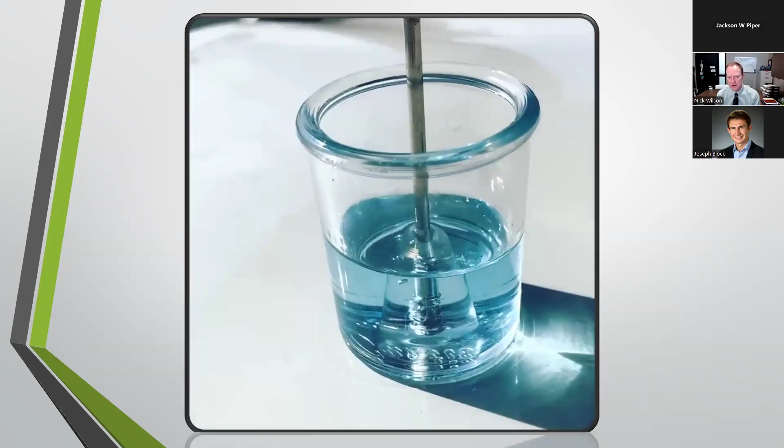This might look like Gatorade, but this is our well-known friend in the GA community, and I say friend in quotes, 100 low lead. 100 low lead has been powering aircraft for quite some time, and I'm a part owner in a small aircraft, and we need 100 low lead currently to fly it.

So it's facilitating our training needs and performing a needed role in general aviation currently. The downside, as is growing in awareness, is that the leaded part of 100 low lead is a neurotoxin. Because of the tetraethyl lead composition, even though it's small volumetrically, it's not good for the environment or the people in it. This isn't the driver of change, but it's one motivator for these discussions, because no one should want lead in their environment. It just isn't good for any of us.

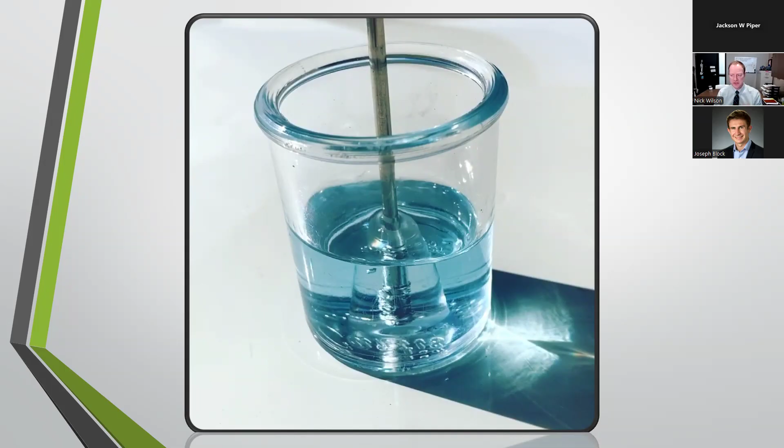So I bring this up as sort of an imagery to think about as we're talking about some potentially better options for aviation going forward.

We can move through here, well introduced by Jackson Piper. Yes, I've been at University of North Dakota now approaching 11 years and regularly speak on this topic and others related to aviation.

So there it is, UND. If we have webinar members not from the Minnesota, North Dakota, or Midwest area, you may not know University of North Dakota is about a 1 hour flight northwest of Minneapolis, or about a 4.5 to 5 hour drive depending on how quickly you drive. We're about 70 to 90 miles south of the Canadian border. So we're up there, with cold winters and warm summers. That's where we're at.

We're a good training location, providing our graduates a variety of training experiences from wind to cold to warmth, all the in between.

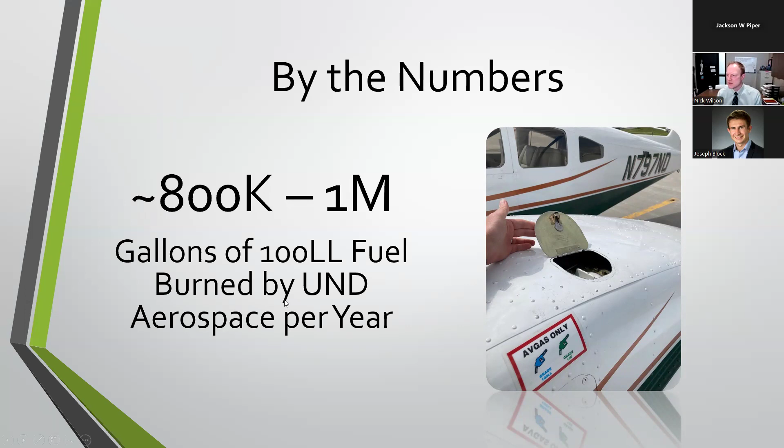The other number to think about is 32,000. We did an approximate estimation of the pounds of 100 low lead required for one of our collegiate aviation students to reach the industry minimum flight hours of 1,000. That assumes they're flying certain aircraft at certain times, giving benefit of dual received or dual given, that sort of thing. So about 32,000 pounds of fuel is needed for our graduates to reach those required numbers.

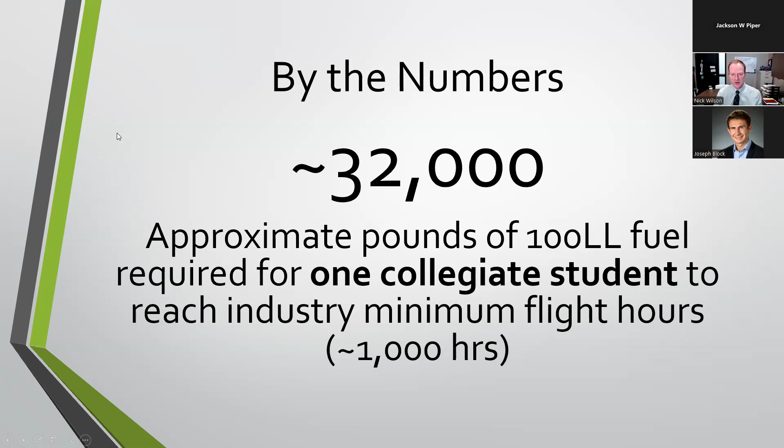So can we do better? That's sort of the question. Let me go back a bit - went too far, there we go. All right, so one of the questions is, can we do better?

This idea of alternate powering of aircraft is not necessarily a new idea, but it's been gaining a lot of momentum. One example is the Pipistrel Velis Electro, a two-seat light sport aircraft with EASA certification, and it has some recent changes to its certification in the US, or its ability to be used for training under an exemption. There are still some limitations there we're going to talk about.

There's also been some attempts to convert existing airframes. CAE and Piper were going to work on converting an electric aircraft. Bye Aerospace is working on their electric E-Flyer 2 aircraft, and they're still working on that. So there's industry motion there.

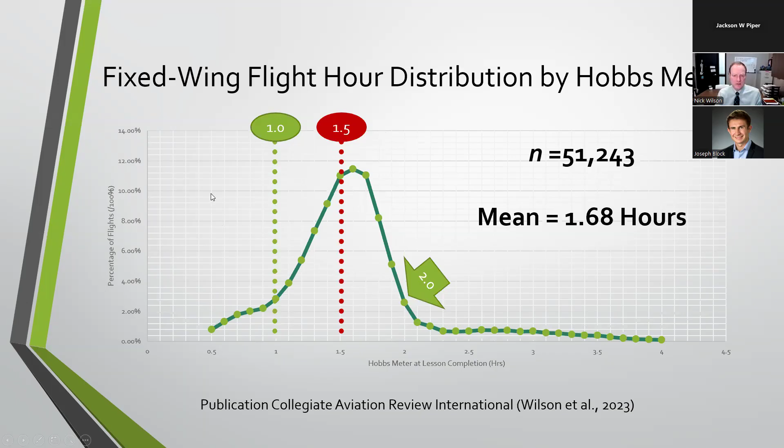So what we really need in our flight training environment is an aircraft of duration of at least 2 hours plus FAA reserve. If we look at our mean of 1.68 hours for flight hour duration, an aircraft that has an hour of duration or an hour and a half really wouldn't meet our current needs today without changes.

Here's the same graph, but a little bit of a different view of the same information.

So from 0 to 1 hour of Hobbs meter length, about 12% of our training flights go from 0 to 1 hour. So if an aircraft can fly for an hour duration plus FAA reserve, it would only cover about 12% of the total flight lessons given our current flight operations.

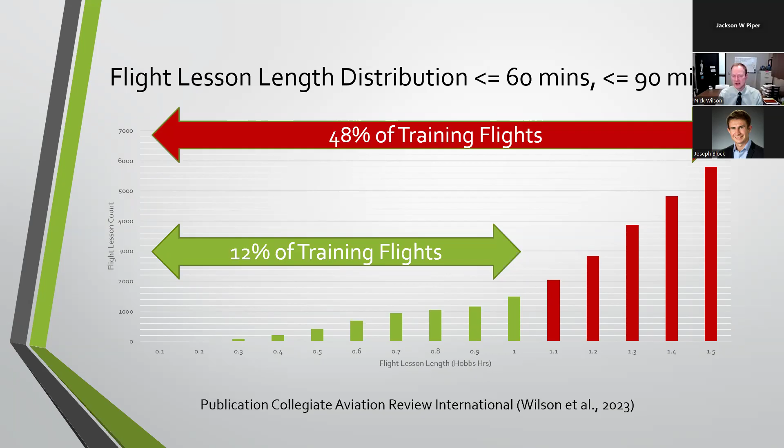Now, if an aircraft can fly 1.5 hours of duration plus FAA reserve, that's approaching half of the total flights. So then if anyone's into curriculum design, you would say, well, that's not really the full story, is it? No, it is not. So let's take another level of analysis on this question.

So then we started looking at it on a course by course basis, and we evaluated how an electric aircraft at the 60 minute or 90 minute, also known as 1.0 or 1.5 Hobbs meter, how many of those flights would be covered. If we look at the worst case scenario, we have over 10,000 flights in this subsample. If we looked at an aircraft that had less than 60 minutes of flight time, only about 8.5% of those flight lessons would be able to be covered.

Then we have private. Let's take a look at that. If we had private pilot curriculum, and we had an aircraft that had an hour and a half of duration plus minimums, about half of those flights could be used in the private pilot curriculum. So that's getting better.

And then if we go to the instrument CFI, also known as the CFII course for those in the field, there's about 3,000 flights in that particular curriculum during that time frame. Almost 80% of those flights could be done using an electric aircraft that had a duration of 90 minutes plus FAA reserve. So that's starting to look a little bit more promising.

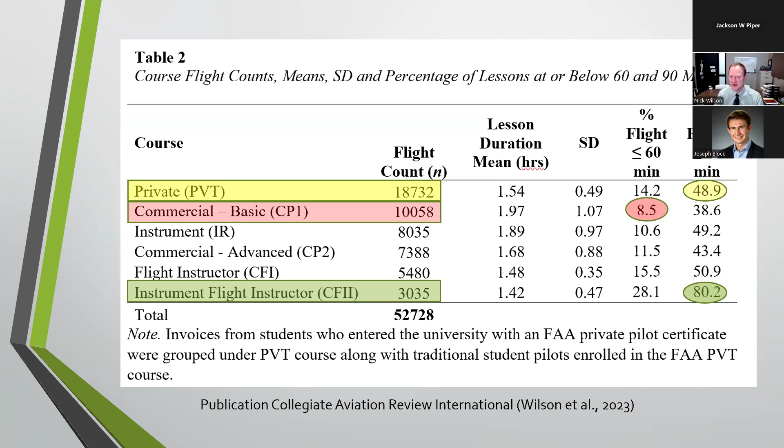And that's kind of one of the outcomes we had was, well, maybe we wouldn't do it in early training curriculum, but maybe you do it in the double-I course because of a better fit. A better idea we're going to get to is battery capacity. Let's get into that here.

Okay, so you can get the sense that you might be switching back and forth between a traditional piston-driven engine and an electric aircraft. That's not necessarily good at primary aviation training levels unless the flight configuration and equipment is set up so similarly that there will be potentially a reduction in the chance of negative transfer. But there's other questions there, that's not the complete topic. There's also risk with that as well, in my opinion.

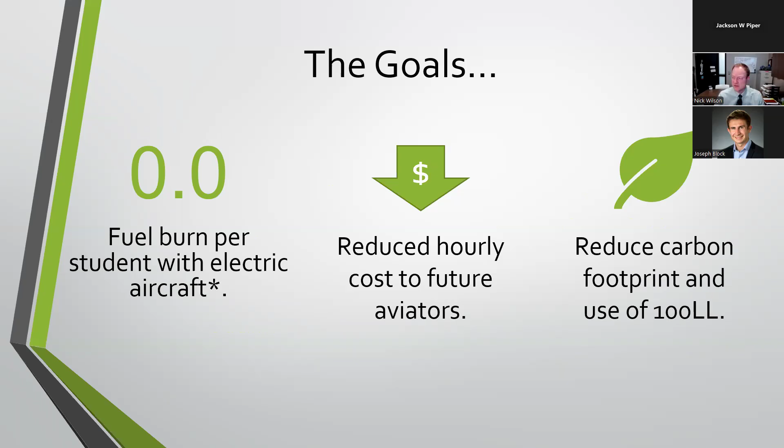But on a case-by-case basis, if we're not adding more fuel burn, generally that is a good thing. Reduced hourly cost to future aviators is good for everybody, helping not carry as high a debt burden entering the industry. And reducing our carbon footprint and use of leaded fuel, reducing leaded emissions into the environment, is usually a good thing. So we went relatively quickly through part one.

This publication, Technical and Regulatory Factors of Adopting Electric Training Aircraft in a Collegiate Aviation Setting, is available if you search scholar.google.com for this title of the article. You will find it, and it is free to download. There's quite a bit of background information in there to consider if this is the first time you're engaging in this topic.

With that, I'll pause and open it up to questions. Jackson, do you have any individuals who have offered questions? I'll get a drink of coffee while you do that.

I see a question here from Nathan Williams asking, are you tracking your ground time? What is the average time an aircraft spends on the ground between flights? Yes, this is a great question. As part of this data set, we did not look at ground time. We have this data, so the short answer is, do we have ground time? Yes, we can get ground time. At one point I knew what the average ground time was at KGFK, but I don't want to misquote that or give you a wrong impression.

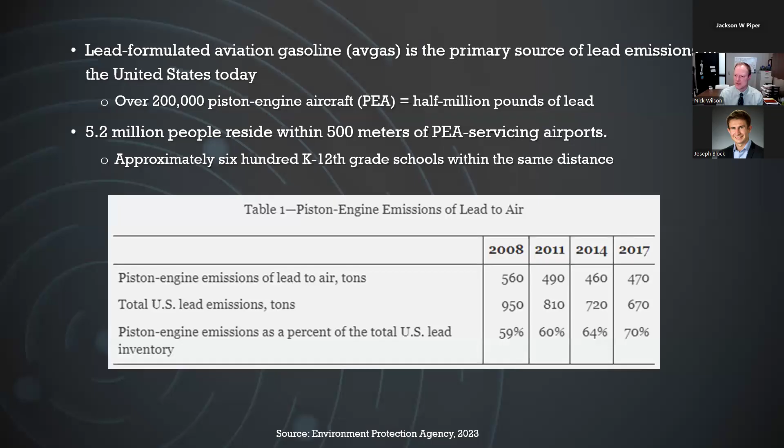There's also an estimation done in a different study about how many people live within half a kilometer, 500 meters, of airports—they found that's 5 million people within the airport environment. There have been quite a few studies suggesting higher blood lead concentration in people who live in closer proximity to airports, which may have an impact on them, subject to further study.

So my colleague and I looked at questions not necessarily about lead and blood lead levels, but about economics and attitudes related to electric flight. One factor we looked at is how important removing lead from the environment is on your decision matrix. Let's take a look at a little more context before we go into the study itself.

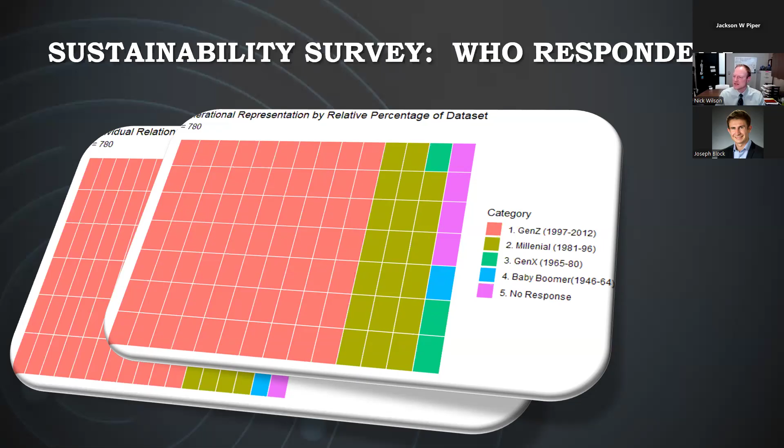And then you wonder, okay, what's their demographic group? So we also looked at demographic group as a question. Gen Z, of course, since it's predominantly students, then we have millennials with slightly less representation, then Gen X, the baby boomer range, and then people who did not respond to the question. So that's how that makeup looks.

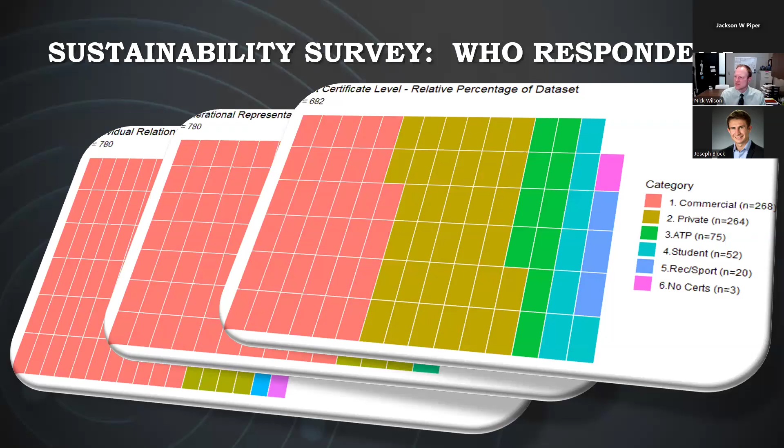And then finally, certificate level. We had roughly equal amounts of commercial and private pilot certificate holders. Then we had some ATPs in there in the green, some student pilot certificate holders, some rec and sport pilots, and a few that did not have certs.

So this is a graph I'm going to spend some time on. Now that we know who responded to this survey, I want to mention this graph is kind of interesting—general opinion on sustainability in the aviation industry. On the x-axis, going across the bottom, is the level of agreement to the question: is environmental sustainability important for the aviation industry? On the left would mean strongly disagree, on the right would be strongly agree, and in the middle is sort of 'I'm not really sure, it's not important to me, I don't care,' somewhere in there.

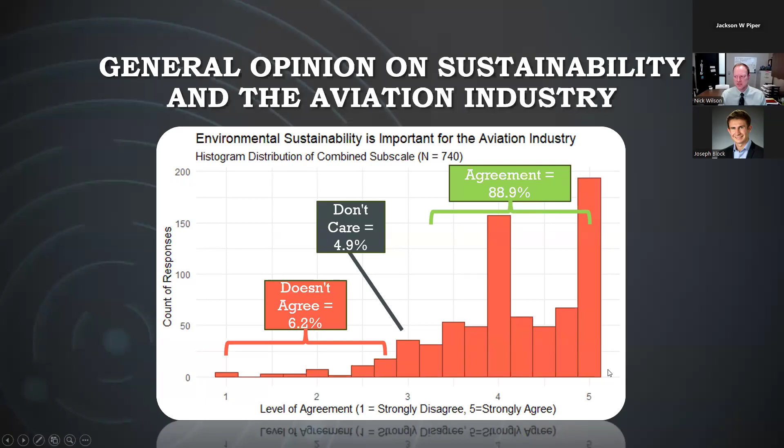If you look at the total amount of respondents, the people who don't think environmental sustainability is important are only about 6%—that's people who are below the 3.0 mark. I lumped that whole group together, and it's only about 6% of that audience. The people above neutral, so anywhere from probably pretty important to really important, that's almost 90% of this population that we studied. So that's an important thing to consider—this is a piece of data that's helpful to understand.

So then we also looked at this question. Understanding that sustainability is important, most of us think it's important, but the same group was asked: what would it take for you to switch to electric aircraft as a discount? So if you're paying $100 an hour—we know it's more than that—but if you're paying $100 an hour, what sort of discount would you need in order to switch to an electric aircraft? This is what all those individual plots are, with their age. We put their age and their expected discount that would have them switch from their current piston-driven aircraft to an electric aircraft. You can see this all plotted out. We've got a lot of students here in this black, right?

So that's Gen Z, and Gen Y is in red, Gen X is in green, and the baby boomer group there—we didn't have too many, but we had those in blue.

The interesting trend is as we get older, we have more disposable income. We're not thinking about things like student loans and paying flight fees. This trend line actually starts to trend upwards.

So the amount of discount needed to switch to electric aircraft actually reduces. It peaks, meaning the need for a discount is greatest when we're seniors in college, the point where we've accumulated flight fee expenses or student loan expenses. We're looking at over 30%, actually higher than that—we have 25, this is about 37 and a half. We're probably approaching 35% as a college senior because they're really focused on expenses.

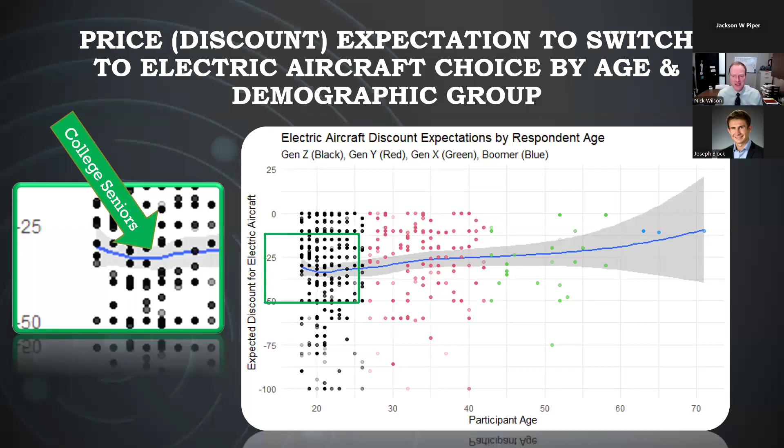I'm going to move on for time because we have quite a bit left to talk about. We then looked at combining this question—we wanted to look at, okay, if you think removing lead is important or good for the environment, what does that also mean for your expected discount to switch to electric aircraft?

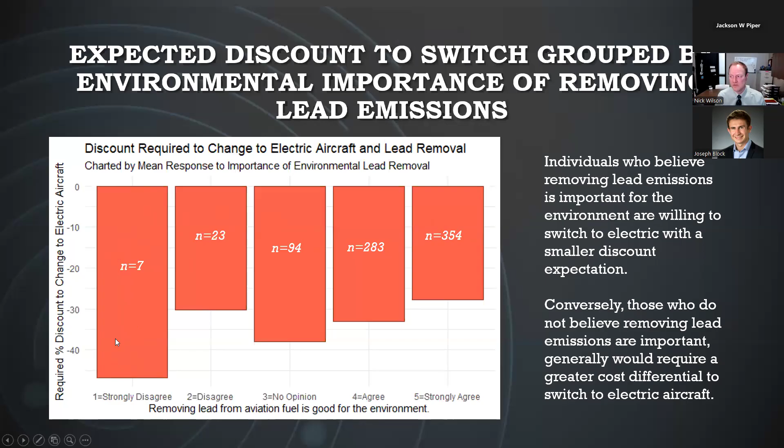So this can help us understand where people's opinions generally lie. I always find this kind of visualization really helpful, particularly for policymakers and maybe marketing. If you think about this as a business opportunity, which it is, this is important to think about.

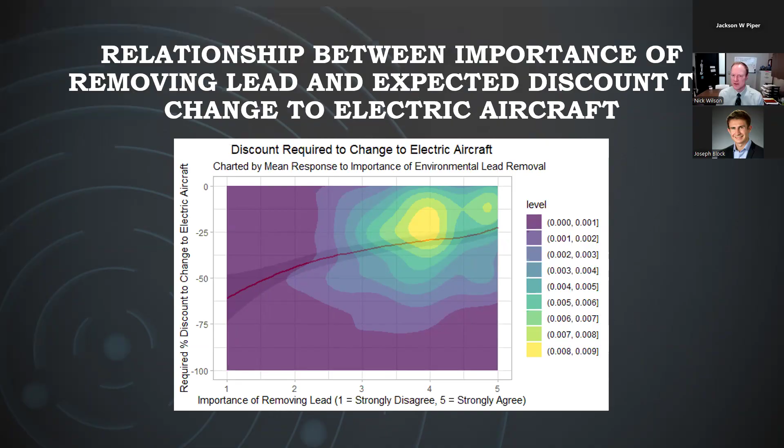I know we have just about 12 minutes available. I do want to touch upon some qualitative comments, because I think some people like to hear those. So rather than the quantitative, which we've discussed, we also have the qualitative, which are the people's raw opinions. I had a lot of data to look at, so we just looked at a subset of this.

We do have in this sustainability question different groups, and we see the quant piece of that—this is the qual piece. I call this group row 39.

There's an indifferent group—row 39 is people who are sitting way back in the aircraft, kind of along for the ride, whatever. The comment here is: 'I don't have any comments or concerns at the moment, but all this seems really interesting and I will look into it in the future.' You know what that means—I'm not planning to do anything today.

'I don't mind being more environmentally friendly as long as it does not cause me to take an unnecessary risk.' Okay, environmentally friendly is fine, but don't make me do anything I don't want to do. That's the row 39 group.

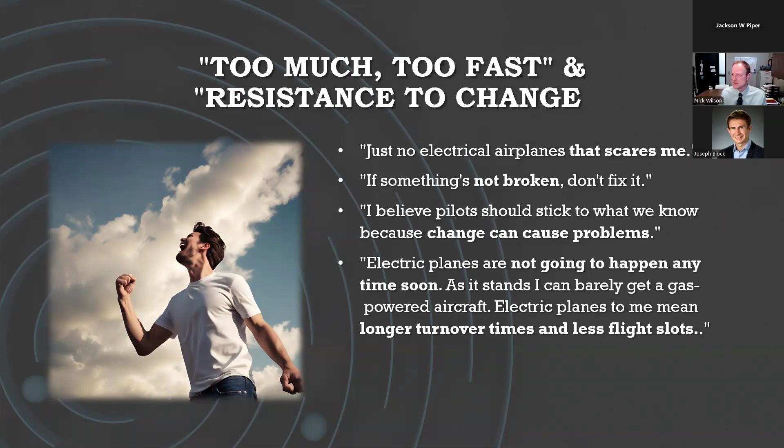In this case, the group is obligation and be a leader. The quotes in this group suggest it's a necessity for the future of aviation. Making any move to sustainability is of great benefit to the aviation community and future world. I think we should do it as fast as we can. And then finally, it'll happen eventually. Better to bite the bullet and get it over with earlier.

So this is an interesting group. They're going to help lead the change. They are going to be willing to take on and try new things, and they also feel an obligation to their community in some form or fashion.

I believe there's one more group. This is a guilt and frustration group. This group is motivated by the fact that potentially what we're doing today needs to be done faster, or maybe what we're doing today isn't as good as an alternative.

So the quotes from this group included that we're not investing more in sustainable equipment already. So this person is frustrated that change is too slow. Next quote: I believe the aviation industry needs more environmentally sustainable options for flying, as I have seen many articles about public figures and their private jet usage. These articles put aviation in a bad light by talking about emissions in these aircraft.